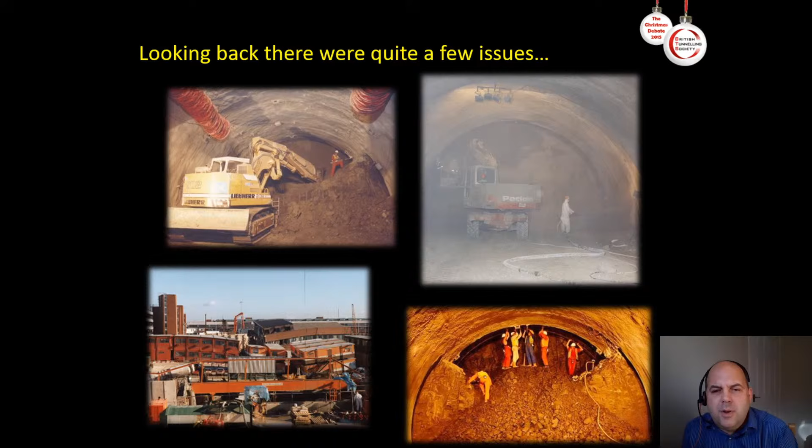This is a scene in a tunnel I worked in nearly 30 years ago. And the interesting thing about this was it was seen as great innovation - this was the latest thing, because this was the application of the new Austrian tunnelling method into a UK project.

The photo looks rather unclear, but that's not a criticism of the photographer. The reason it's like that is because of the amount of dust in the air - dust from the dry mix shotcreting. You can see the nozzle man standing, holding a handheld nozzle, spraying dry mix onto the right-hand side of the heading.

He's got his back to the plant, which is evidently moving. If you look very closely, you might just be able to make out that the plant is actually a cherry picker, and in the basket of the cherry picker are a couple of people working. I was one of those people - we were wiring up instrumentation in the tunnel.

There's lots of things about this photo that we wouldn't want to replicate today. So some questions about our industry: Is it an innovative industry? What are our successes? And what are our challenges for the future? I want to think about those a bit more.

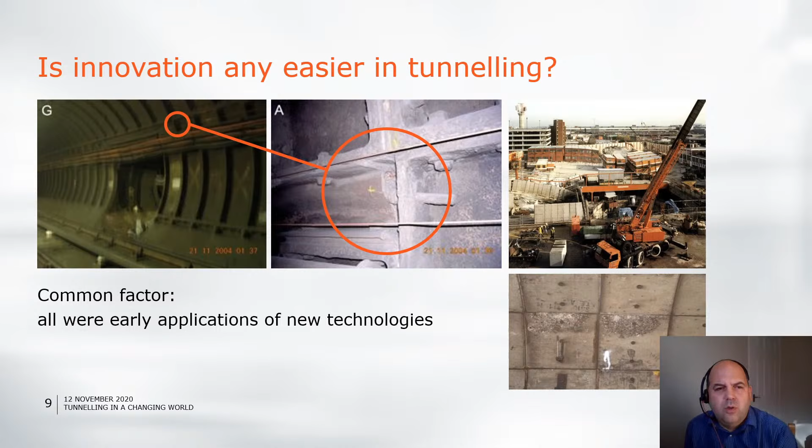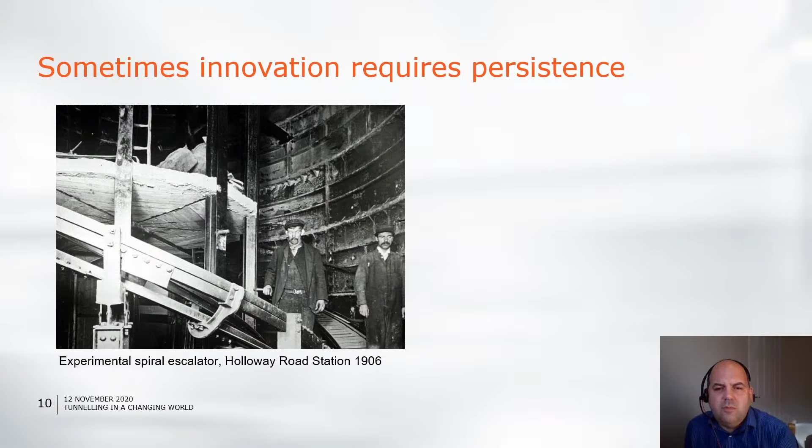Sometimes what you need is just a bit of persistence. This image is an early attempt to put a spiral escalator into a former lift shaft in a tube station a century or so ago. At the time it was a failure. They couldn't get it to work, and the details are now lost in the mists of time. But people have kept on with the idea, and in consequence, one thing you can now find is spiral escalators that work. They're relatively common in some parts of the world.

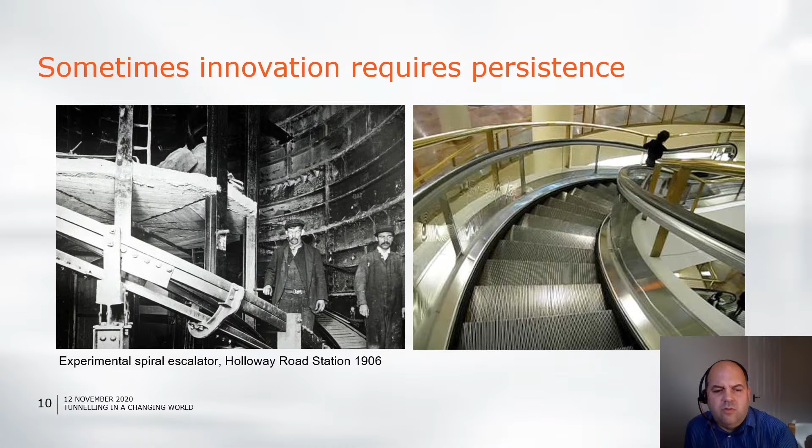It's important to recognise there is a human dimension to this as well. I've mentioned persistence there. I think there are two sides to the way people tend to think about innovation and change. There's the innovator. He or she will be full of enthusiasm, excitement, and will see all the upside benefits of adopting the new product, whatever that may be. And I've seen plenty of examples of that over the years, some of them making proposals to me about how we might better do whatever it was that was the challenge of the moment.

But then I've also seen the other side, perhaps the manager who's charged with implementing the change. There is a downside that some people perceive. It might be concerns about the cost or whether it will work, whether there will be a return on the investment. They're all perfectly reasonable concerns, of course. But what it emphasises to me is there's a bit of importance we need to attach to some of the softer skills as well as the technology when we think about change.

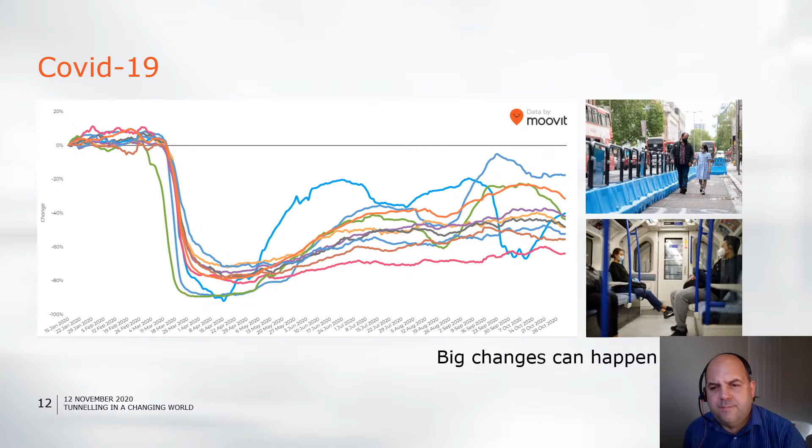So innovation and change, they're driven obviously by a vision for some sort of improvement, but they're not always things that we welcome. They can be a bit risky and they need persistence. And that means it's perhaps quite easy to be a bit passive about changing things sometimes. But I think we have to recognise that sometimes we have a choice. Either we can get engaged and drive what happens, or we perhaps just have to wait passively and see what is done to us.

So the first question I posed was, is tunnelling an innovative industry?

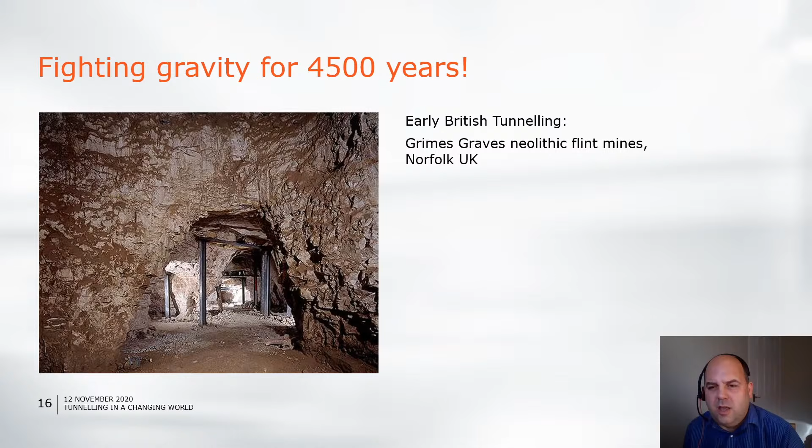A definition of tunnelling that always appealed to me was fighting gravity. As far as I can make out, we've been at it in the UK for about 4,500 years. If anybody can find an older example of British tunnelling, I'd be delighted to see it. But this is tunnelling for the purpose of mining in Norfolk.

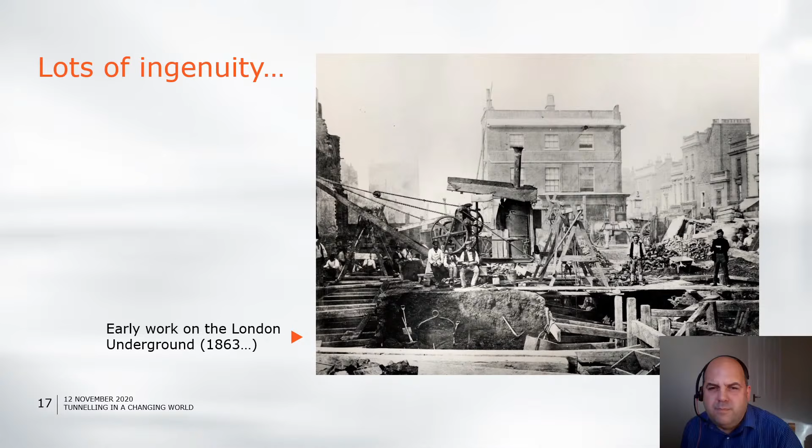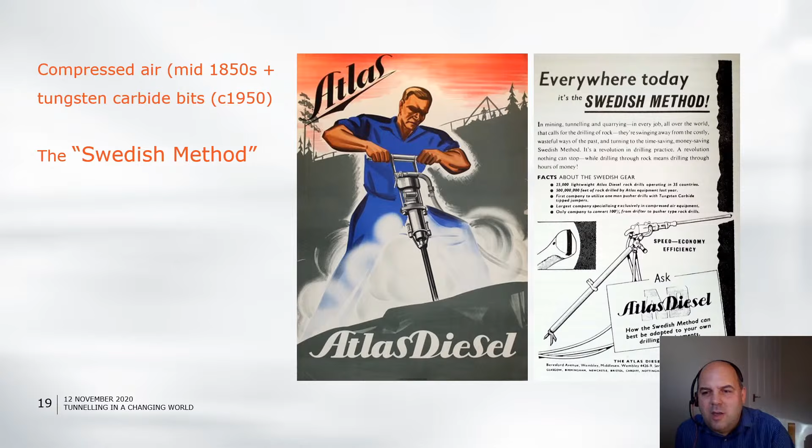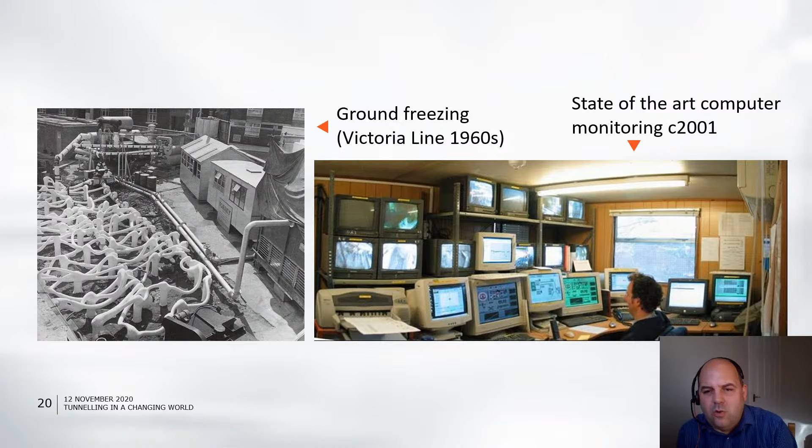And you can carry on in a similar vein. Other things in London, ground freezing, quite a notable piece of technology in its own right, that from the Victoria line. And an image of this control room, which I've always been rather fond of, having spent a lot of time there. Nearly 20 years ago, this was what we thought state-of-the-art computer monitoring looked like. And it was pretty effective.

But we do still like playing around in the muck. There are some things that we've struggled to find better answers to than the traditional ones. We'll come back to this a bit later.

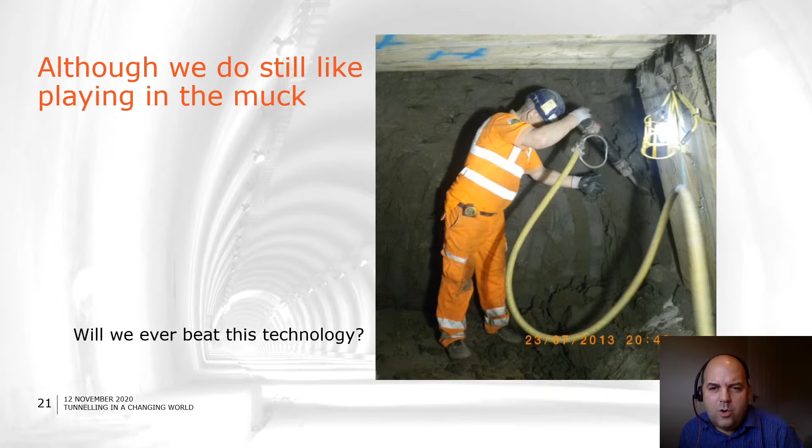So yes, I would argue tunnelling is an innovative industry. We can demonstrate a growing toolbox of techniques. We've got more ways of fighting gravity, if you like. And we do faster and bigger and different conditions, different places. So you can trace the developments we've made. But I'd also observe that quite a lot of our changes are perhaps quite slow, sometimes iterative, reactive. Old habits die hard, and that's something to bear in mind, I think, in a time when some of the changes seem to be coming on us thick and fast.

We've developed a saying in my team, in my current project. We look at the environment we work in, and we describe our state as being a steady state of continuous change. I think you could apply that quite well to our industry as well. I think we are used to being in an environment where we are continuously and steadily changing.

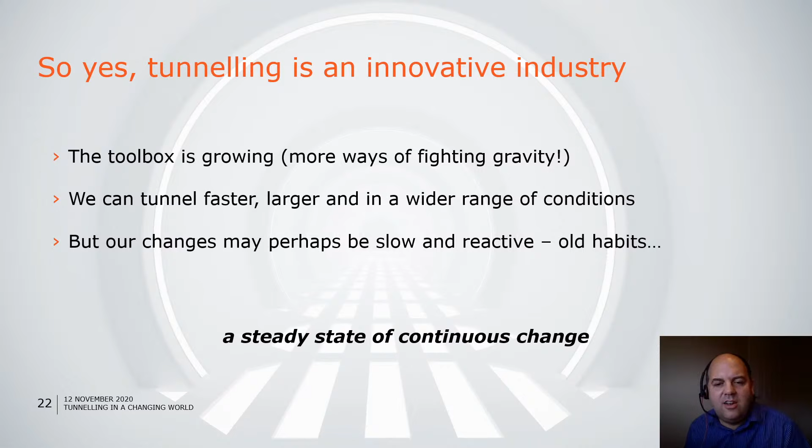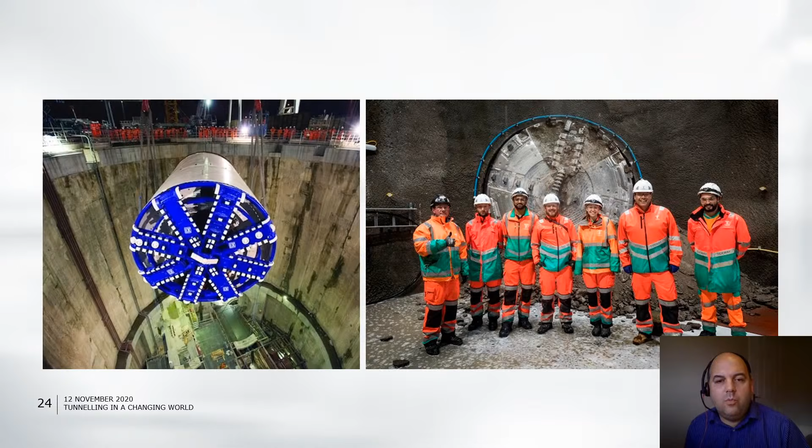So what are our success stories now and in recent times? Clearly, one way of measuring our successes is to look at what we've achieved, the projects undertaken and the tunnels successfully completed. And illustrations here from Crossrail and Tideway are really good examples of what we can do with our tunnelling.

If we think about different ways of measuring what we've achieved, we can evidence the claim that we've got bigger. This slide, prepared some years ago, traces the growth in our shield-driven tunnels over time, from the Tower Subway when we were down at around 2 meters, up to some of our modern railway systems where we're much larger. And now the project I'm currently working on takes that further still. So it's easy to measure and demonstrate that we can do more than we used to be able to do.

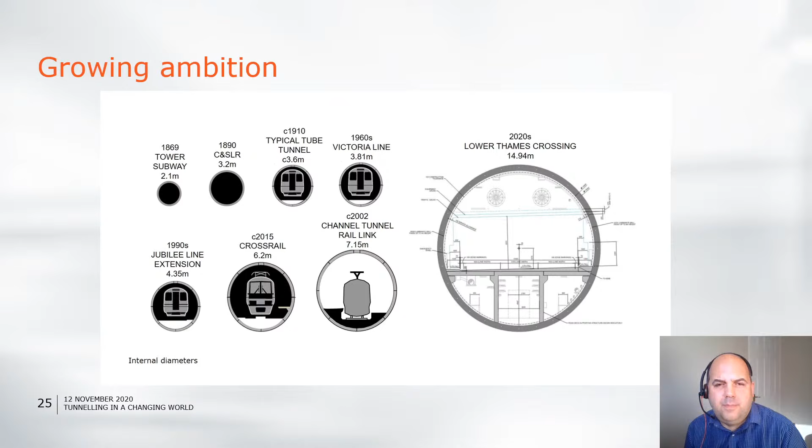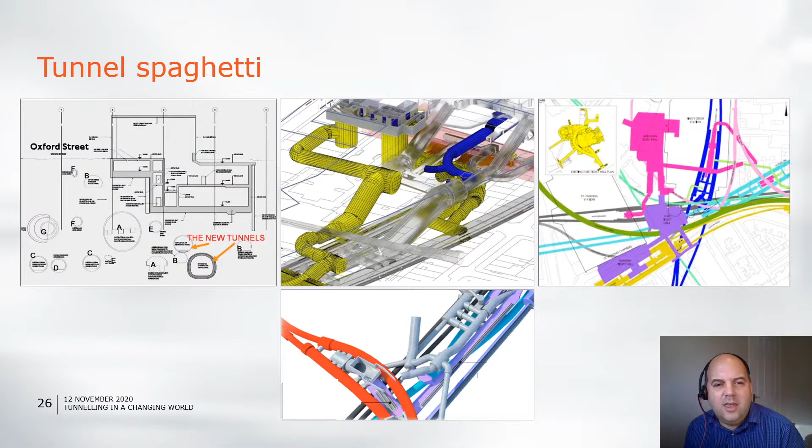We can also do complexity. Tunnel spaghetti was a term that we coined, I think, originally at King's Cross, the top right image here. But these are all images from London Underground stations we've worked on in the last few years. Our ability to create these complex networks of tunnels winding round one another, but without disrupting one another, is a truly spectacular achievement. And it's perhaps a shame that most people don't see the complexity of what has been done.

And we've got better at some of the related things. Our dust and noise control has been a key consideration underground, and we've changed plant and systems to get much better results on that. We've also improved our quality control in general, with things like off-site mix control, to increase the amount of our work we can accept immediately as permanent works, where traditionally or historically it would have been condemned as temporary works only.

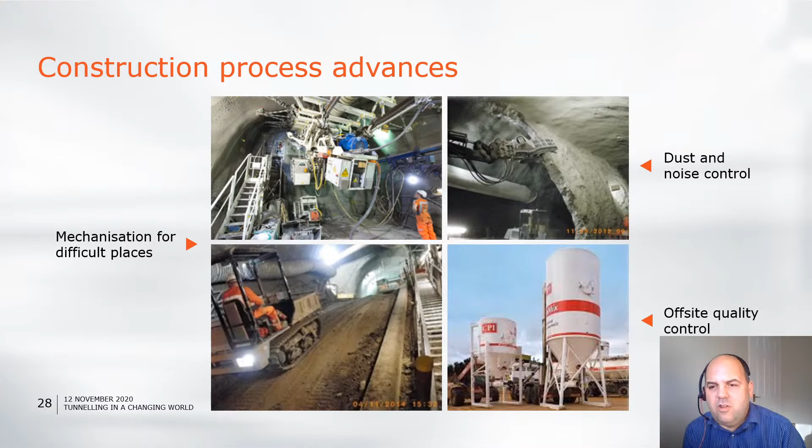We've achieved some other things too. Reducing impacts, and particularly ground movements for urban tunnelling, has been a big subject area and something I've worked on a lot in my career. 25 years ago, the big achievement was to take the Jubilee Line extension past Big Ben without tipping the tower over. Compensation grouting and various measures were used to deliver that work very successfully.

More recently, we've got better with our control, but we've taken on bigger challenges still. I've done a number of projects over the years where we've had to mine under escalators, which are very precise machines and very intolerant of movement. And we can now fairly consistently deliver major tunnels under systems like that without disrupting them and without necessarily resorting to solutions like grouting.

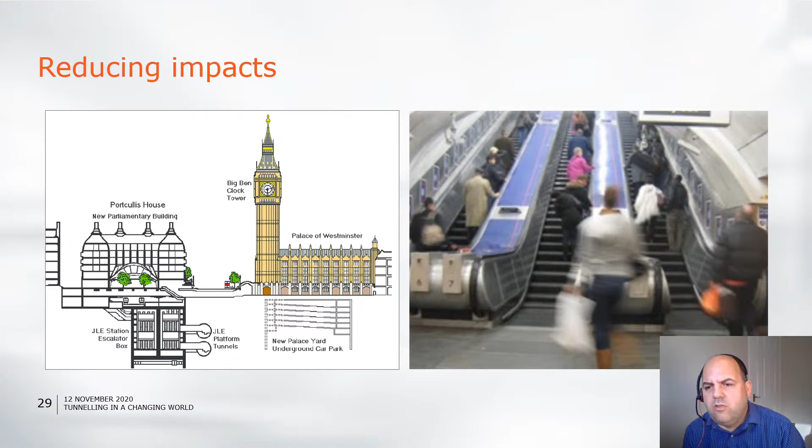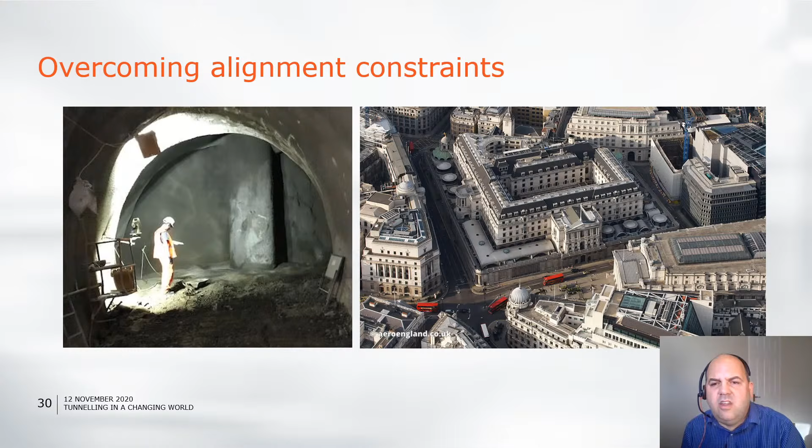And it's really significant in terms of the way we plan future schemes. At Bank, we were able to superimpose the idealized railway alignment on the city layout, and because we could intercept piles and manage them where we had to, we were able to optimize the railway alignment. Historically, we'd have struggled to wiggle through and ended up with a very poor railway. So that ability to deal with the structures we interact with has made a real difference to how we plan future schemes, and has a dramatic impact when one comes to alignment for a new project through the city.

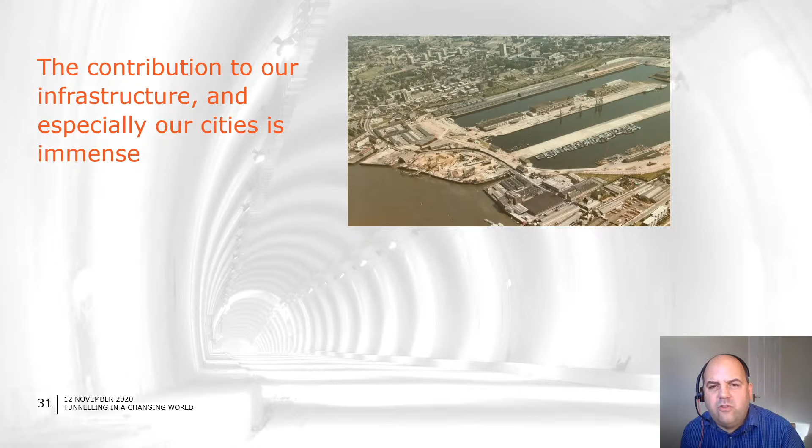And all of this work contributes dramatically to our cities and the world about us. This is Canary Wharf as it was probably about the 1980s. And of course, we now know it is a transformed area. It's our ability to put infrastructure, and particularly underground transport infrastructure, in that has enabled that sort of transformation.

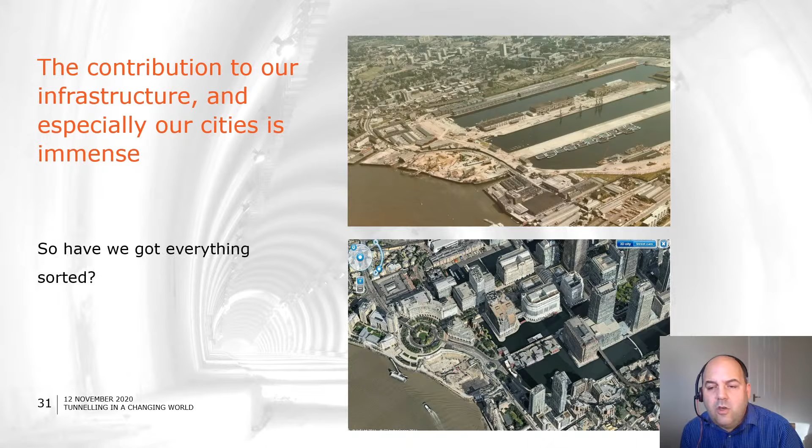So, have we got everything sorted from an innovation point of view? What challenges do we expect to encounter as we move forward? I've suggested a number of things which I think are important to us in the future. Not necessarily all of the same weighting or the same types of issues, but things I think will make a difference.

Let's start with carbon. Carbon is a subject that's in the news a lot at the moment, and certainly within the Institution of Civil Engineers, particularly a subject of a great deal of discussion.

If you haven't already listened to our new ICE President's presidential address, I would very much encourage you to do so. You can get to it through the ICE website. Rachel Skinner has taken zero carbon, and zero carbon for infrastructure in particular, as the key theme for her presidential year. She's highlighted that a very high proportion of carbon emissions are associated with infrastructure. So it's very much in the domain of civil engineers in particular to address that challenge and think about what we can do differently.

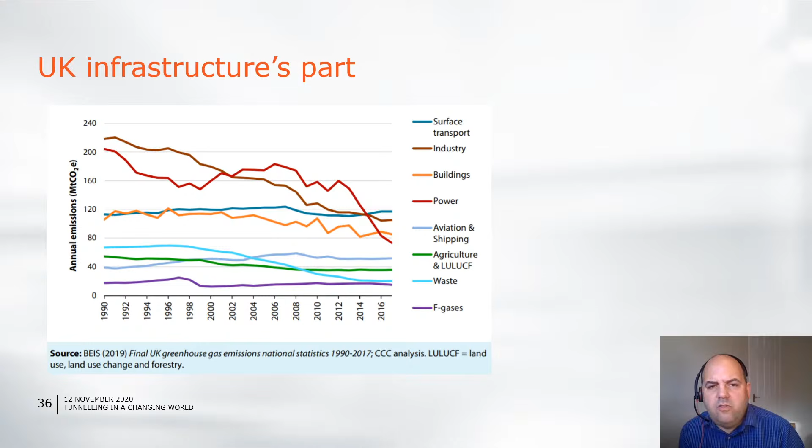And of course, it's now the law that we are aiming for a net zero position by 2050. Lots of discussion about what we can do and whether it should be sooner, of course.

So what does it mean in terms of tunnelling? Where is the carbon in tunnelling? This is a generalisation, but based on various things I've looked at. It's quite apparent that the embodied carbon in tunnelling is concentrated in a few areas. We're big users of steel, cement and concrete, and quite big consumers of energy, and those make up a large part of our emissions. There are then a whole mix of things which contribute the balance.

So what can we do about it? How do we respond to Rachel Skinner's challenge? Well, there are various measures that we can pursue. Firstly, of course, what can we do by design? If we build less, or build more efficiently, then we will reduce our emissions. That raises, I think, some interesting challenges for us, particularly for our design, and questions like redundancy and design life may come much more strongly to the fore.

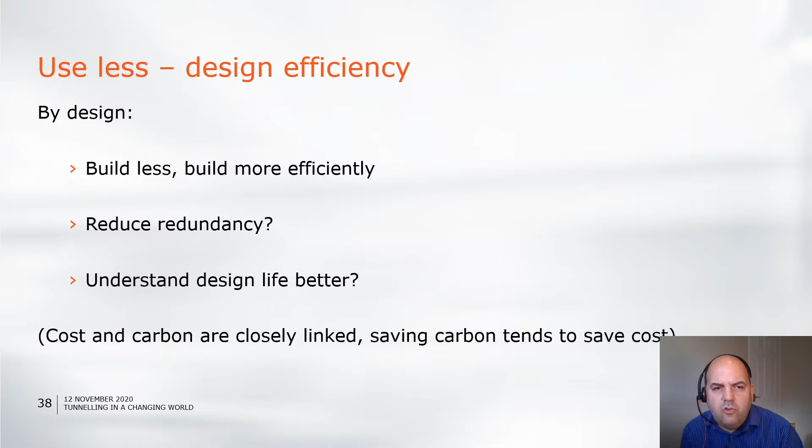I think we need to be having more debate about what is an appropriate level of redundancy in some of our designs. I strongly suspect that some of our structures are, shall we say, somewhat more robust than might actually be required. And of course, carbon and cost link very closely, so it's really just a double incentive — it works together to look at design efficiency. I'm sure we're going to see much more focus and challenge around that as we go forward.

There are other things. I've highlighted already the part that our materials play. There are alternatives in existence for many of the high carbon materials we use, but then we may be reticent about their use, and we will quickly get into discussions about standards and specifications and what's acceptable. But I think those are conversations we need to engage in.

So a couple of illustrations here. One highlighting that alkali activated cements, which are much lower carbon, are now starting to come into use, as an example in London, in piling there. We could look at things like recycled aggregates — we might turn up our noses at some of it, but we might see opportunities in there.

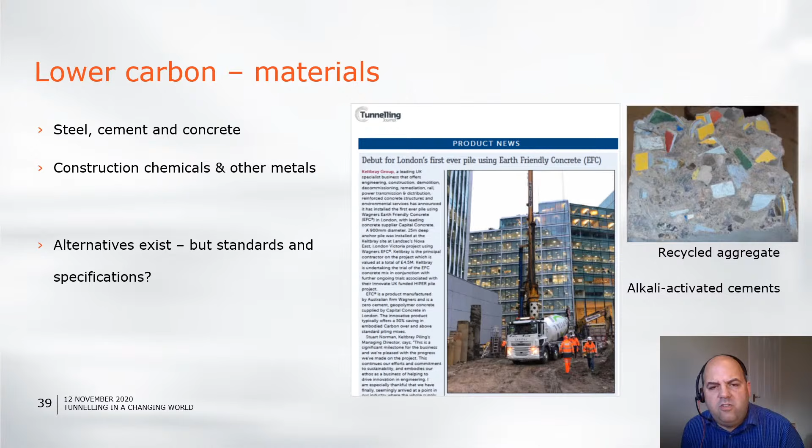We need to be challenging these areas, and we need to look at our energy sources. Clearly, as consumers of energy, we can look at where our energy comes from and use renewables. But I think there are also some interesting questions specific to us as a sector. It's quite clear there are global trends towards battery-powered equipment and vehicles, and also commercial use of hydrogen fuel in vehicles. Those both appear to be very good green, lower carbon solutions, but both potentially pose questions about hazards in an underground environment. So there's a discussion we need to develop further there.

And then there's offsetting - planting forests or whatever to compensate for the carbon embedded in what we've done. It's a valuable tool, but I don't think it should be the answer. It's a secondary response. We should be looking to solve the problem at source first and use offsetting as a tool to compensate where we struggle.

So what are the next steps? A little while ago I think I would have really struggled with this, but now I'm feeling it's a much clearer picture. We know that we need to consider carbon in our decision making. It needs to be there alongside cost and time as the other two parameters we love to use to measure things, and we need to follow good carbon management principles.

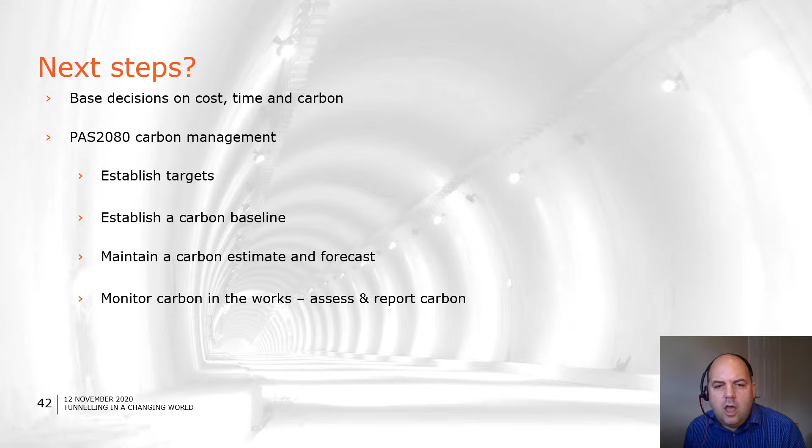We now have a PAS which sets out the way forward. It's not the full answer, it's a step along the way, but like a lot of things, if we start to measure and manage the things we can around this, we will be en route to better solutions. So we should be routinely, going forward, establishing targets, setting baselines, monitoring the emissions associated with our works. All of that is now really in our grasp, especially if we use digital techniques to the full.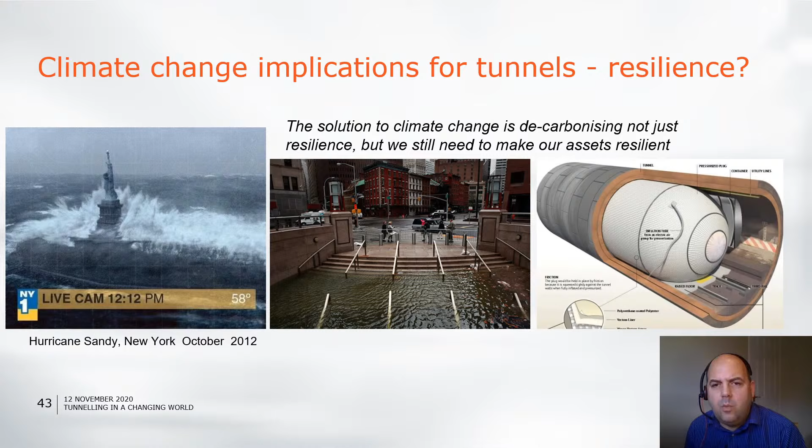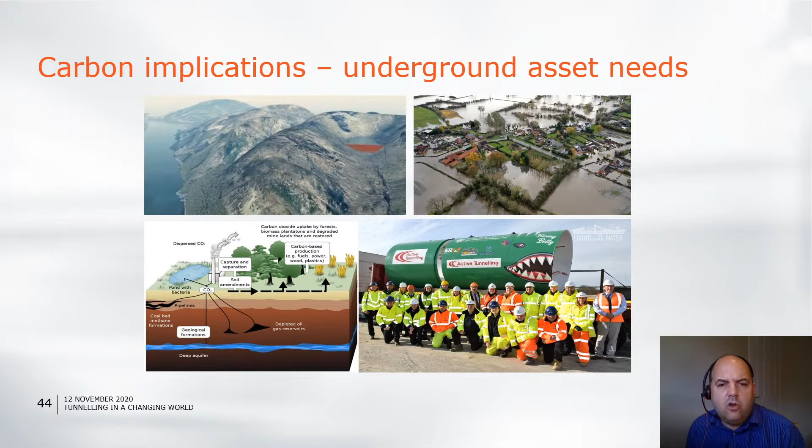So overall, carbon saving, yes, it's driving change in tunnels. It's happening and we do need to act, but we're starting to get a much clearer map of the steps we need to take. We don't have all the answers - we'll need to come up with more and better solutions. It's a real challenge, but I think there's a lot of potential to innovate and improve fairly quickly in our sector.

Let's change tack a little now and think about some different challenges that lie ahead - let's think about the actual assets that we create and use. What does society want from us as an industry? Well, sadly, perhaps they don't actually necessarily want lots of tunnels. What society wants is lots of benefits, lots of outcomes, and I think sometimes we're perhaps not as focused on that as we might be as a sector. So we need to get better at talking in these languages sometimes, particularly when developing the early stages of proposals.

There's lots of good stuff we can be achieving. These are examples from around the world of using underground space to put transport systems underground and reclaim the green space in our cities—clearly a very attractive, beneficial idea.

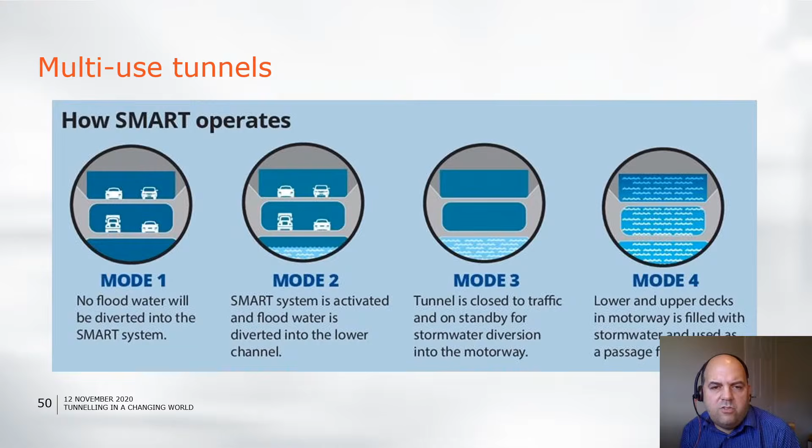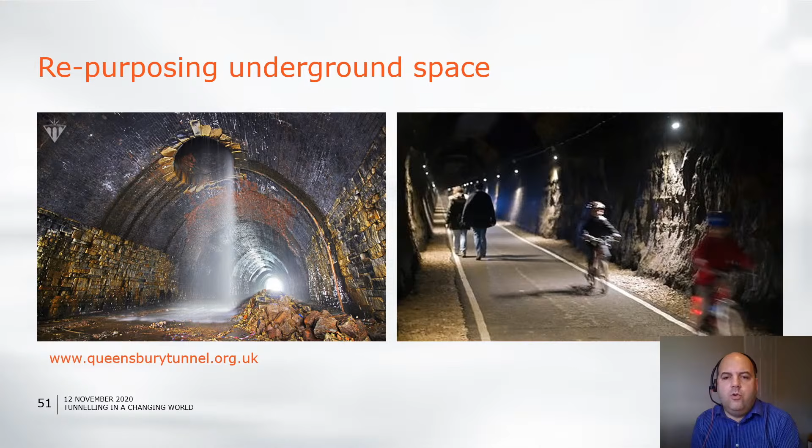On a slightly smaller scale, there are questions around repurposing underground space. We actually have a surprising amount of disused underground space, but it's all assets. I've highlighted on the left the example of the Queensbury Tunnel, which currently has a campaign running to seek support for renovation and perhaps conversion into a cycle route, like the tunnel on the right here.

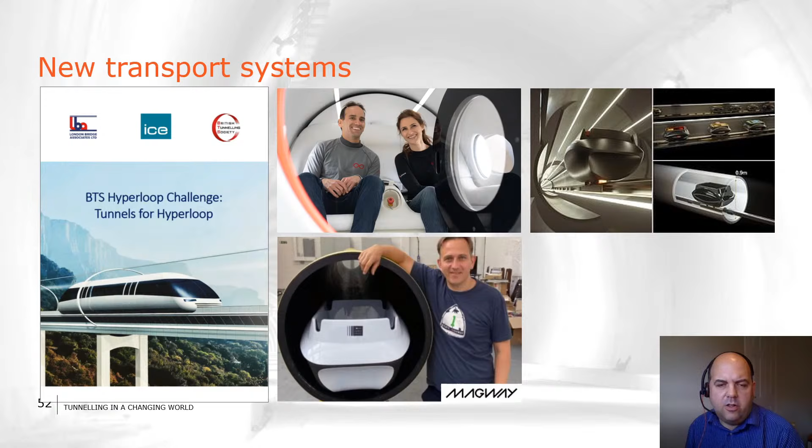Then there are new transport systems which may require or work well with underground space. We're probably all familiar with Hyperloop, which was celebrating its first passenger journeys earlier this week, and Magway, in some ways a similar system, but a proposed freight transport system in the UK. These are all examples of changing demands in society, changing potential uses for underground space, and we need to focus on them.

So all of these are examples of different uses, changes in current or potential use of underground space, and I think it's an area we would all benefit from following. I'd encourage you to support initiatives like Think Deep and ITACUS in the ITA, which are promoting the potential applications of some of these things.

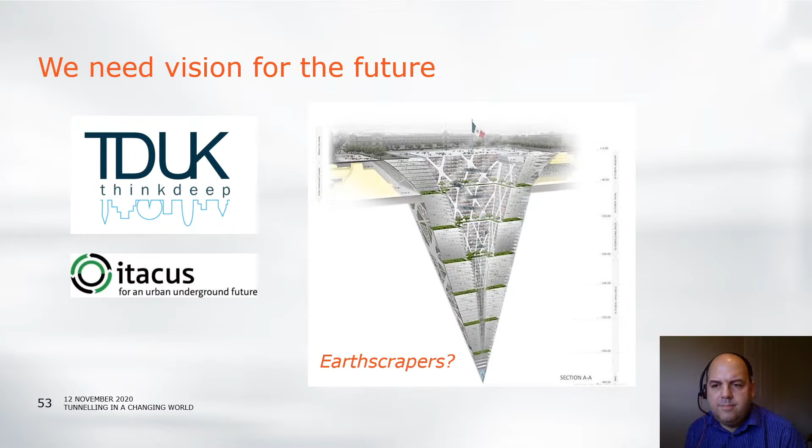Then there's a related set of changing needs issues around aging assets, and that's something quite specific to parts of the tunnel sector.

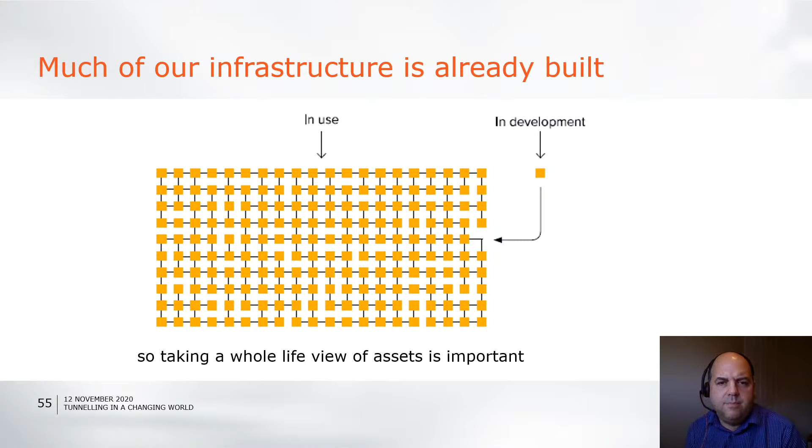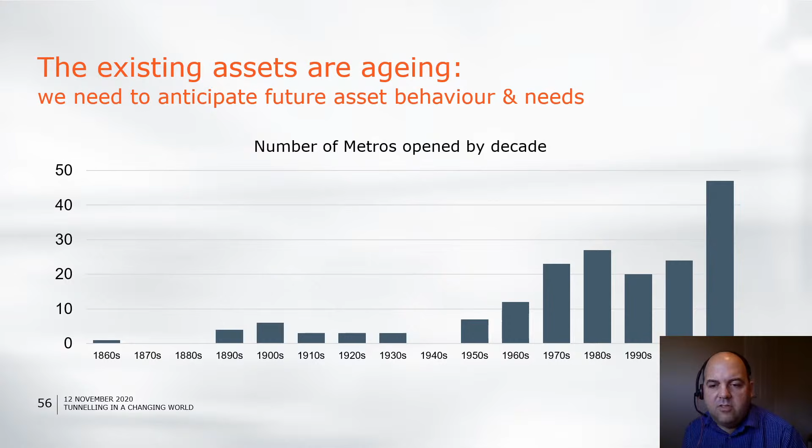Now, the interesting thing to note is that the system life expectancy for a lot of metro systems is probably of the order of 40 to 50 years. So what we're starting to build up now is a sort of bow wave of metros that will probably require renewal.

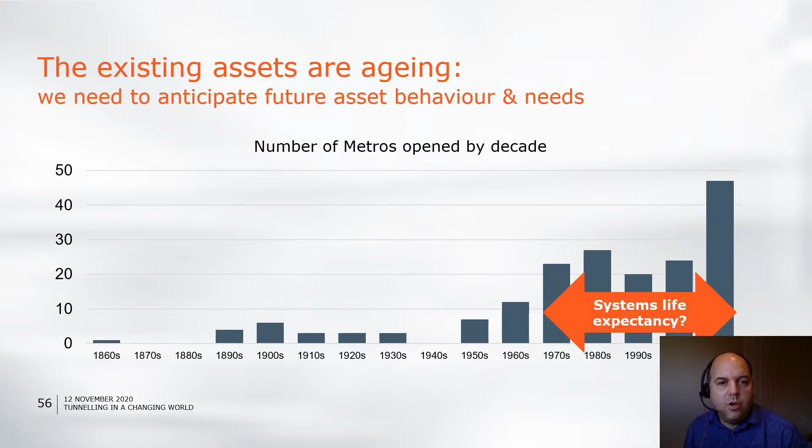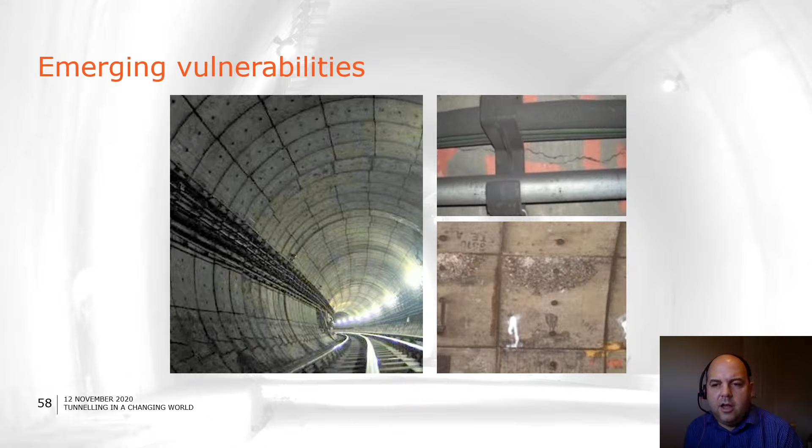Here's another example of structural deterioration in a tunnel, again around the 50 years age mark—cracking and spalling. This was a section of the Jubilee line a few years ago, where an expanded lining was getting into some distress.

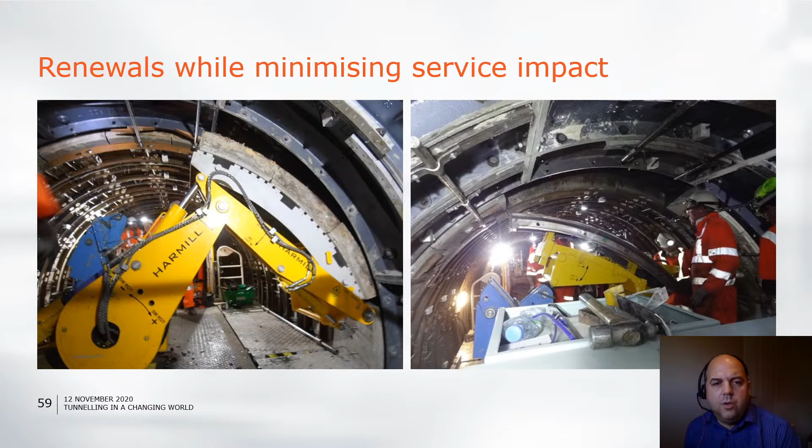But it's an important one to note because it's probably the sort of thing we might expect more of in future years. And just to illustrate the point, here's another job I was involved in a little while ago, actually on the Washington DC Metro, and a similar problem, renewal of elements of the structure required and seeking ways of doing it with minimal disruption to the service.

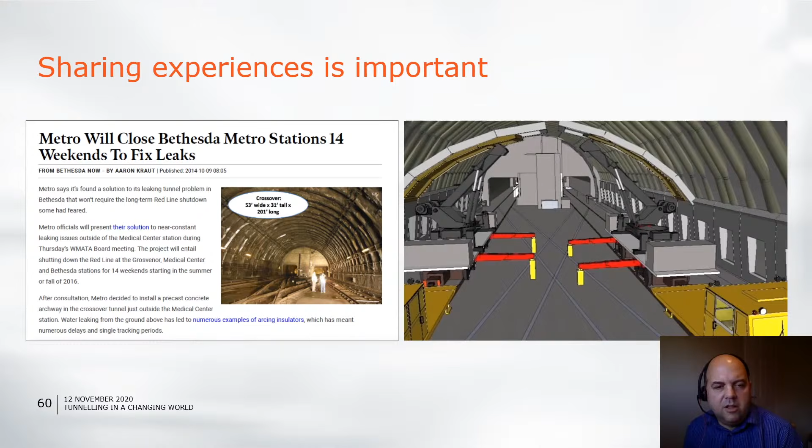This is something that's going to repeat around the metros of the world as those systems that were built after the Second World War start to deteriorate. So when we look at our existing stock of tunnels and we think about what happens to them, what we observe, it's important to recognise that tunnels very rarely collapse, but they do deteriorate, and we should be anticipating that more of our workload in the future may well be refurbishing, renewing the assets that already exist.

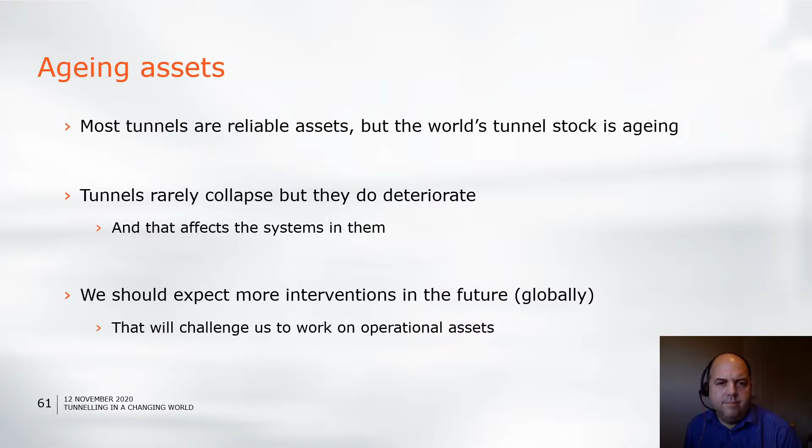So now I'm going to switch to another challenge, or perhaps an opportunity more than a challenge, but the world of digital, which is something else that is changing very rapidly for us.

So to use the language of the Cambridge Centre, this is what smart infrastructure is all about. This is bringing together our physical infrastructure with the digital infrastructure that we can now create, we can now use, in order to get much higher levels of performance out of the combined system.

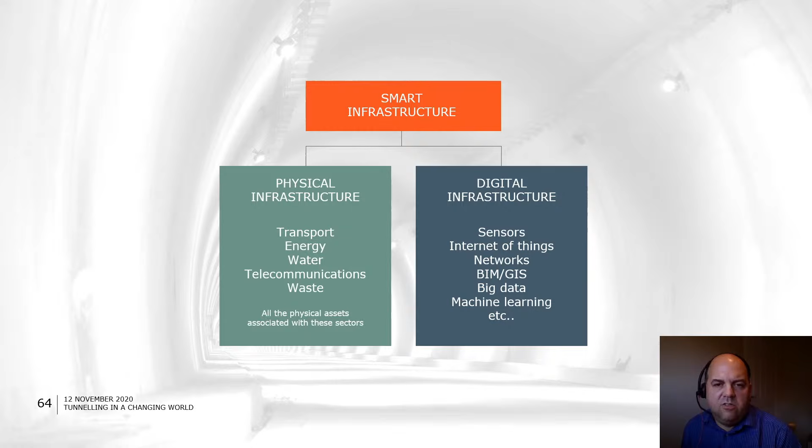So let's have a think about where we are with digital technology. What are we doing today? And of course, the core of a lot of it is the use of 3D BIM increasingly and common data environments. We're getting used to that idea. We're used to seeing the data shared in this sort of format.

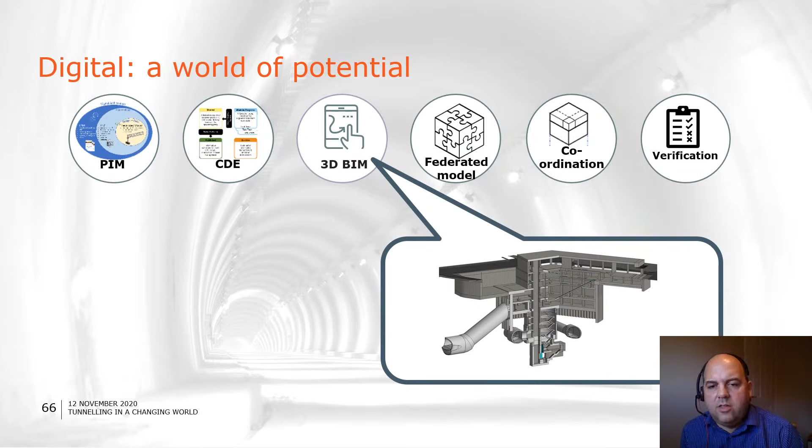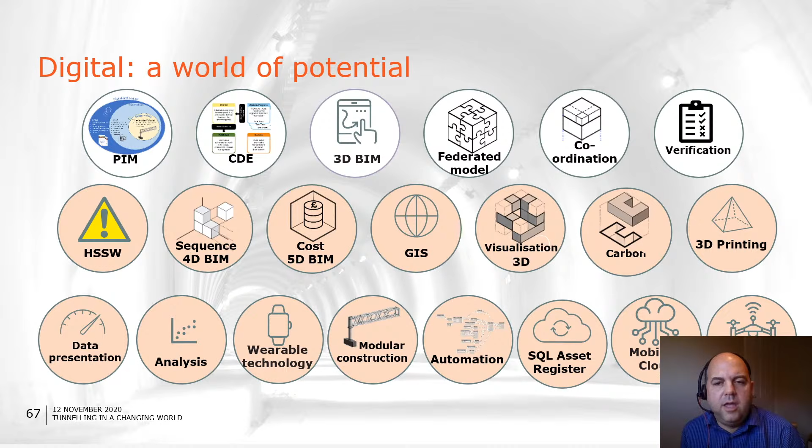But there's lots more potential beyond that with digital. There's a whole range of things that we should be developing and exploring together. Our digital platforms are a great way of sharing health and safety information. GIS provides us with a really good way of communicating ideas and layouts and basic information in all sorts of discussions as we plan works.

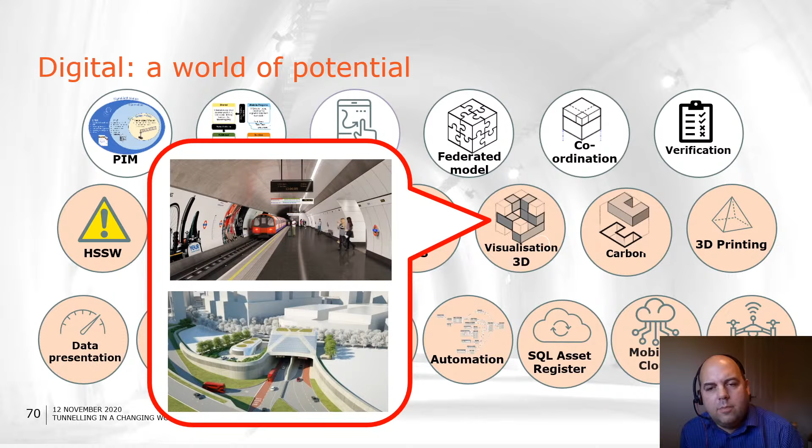3D visualizations are proving very, very valuable in helping the wider society understand what we're proposing, what it will look like. And in just the same way as we can start to put a cost dimension into our models, we can now look at putting a carbon dimension in so that we can monitor carbon more effectively.

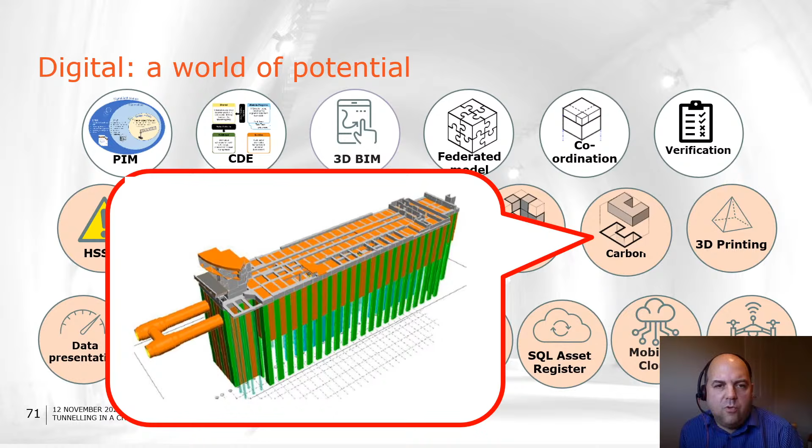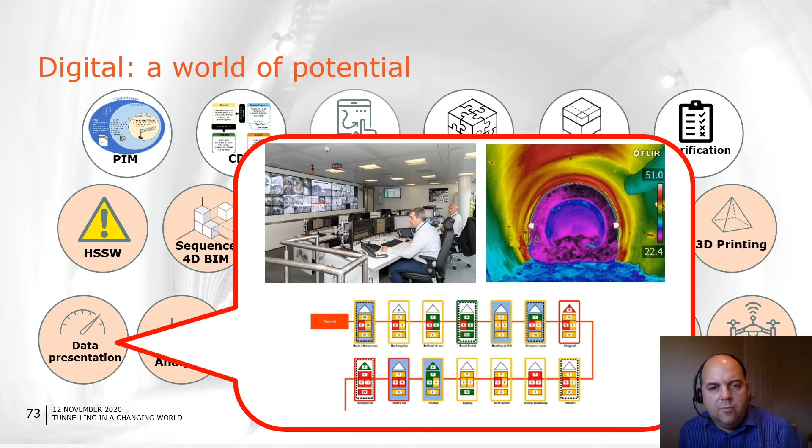We still have problems of burying ourselves in information, but actually digital provides great ways of managing that information and helping us make sense, whether it's visualizations like the thermal image graph here, data feeds into control rooms, or any number of different forms of dashboards of key information. It can all be done digitally very effectively.

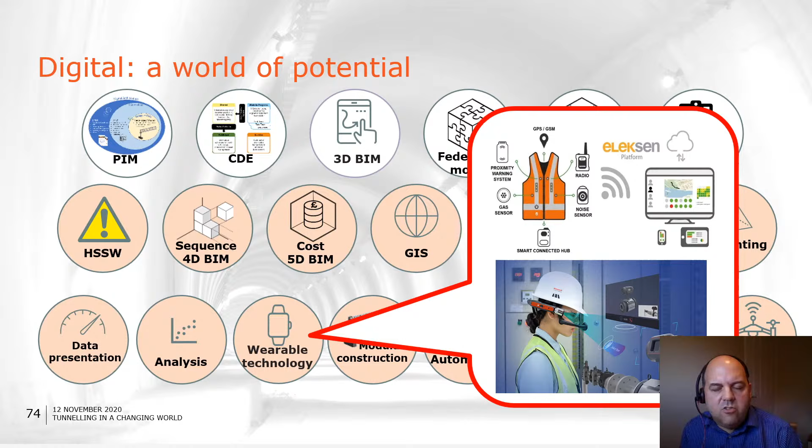Wearable PPE is an emerging technology. Things like proximity sensors and health monitoring are potentially great measures to improve the way we look after our people. Modular construction, well, we're kind of kings of that already in segmental tunneling, but it's all enabled or helped by digital now.

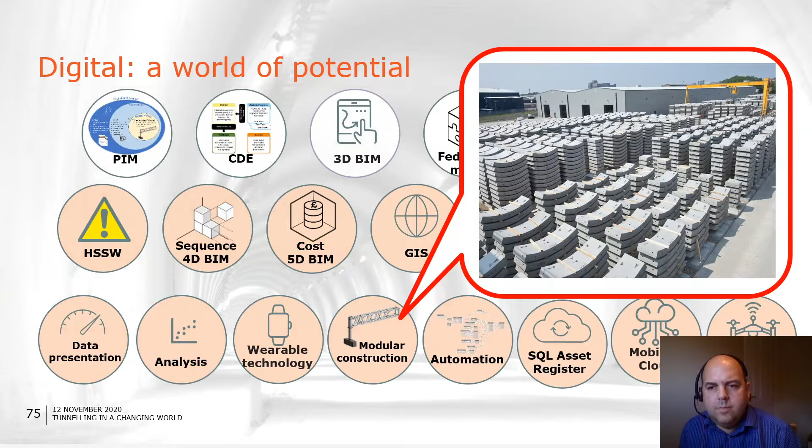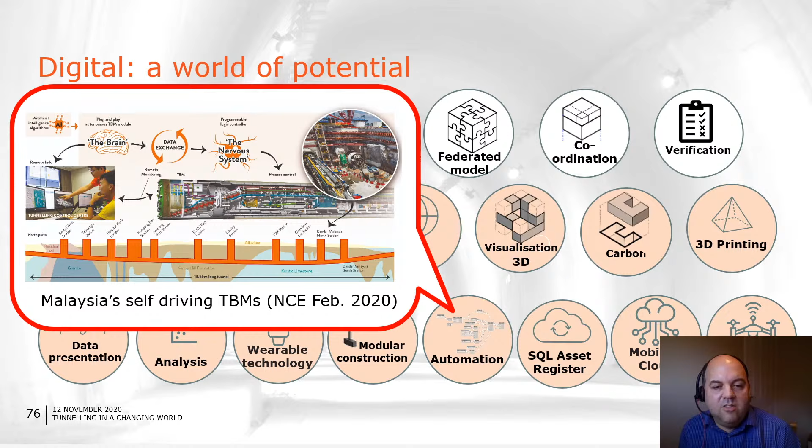And potentially in the future, there's automation. This was an illustration from NCE earlier in the year of reputedly self-driving tunnel boring machines in Malaysia. And it just goes on and on, the potential. There's robotics, that's already in the tunneling industry with equipment for tool changes being developed and robotic earth moving plant.

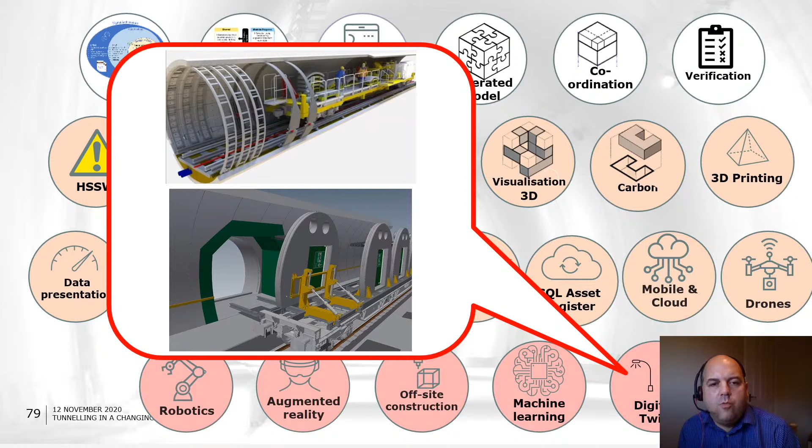There's digital twins. Some of the works I showed you earlier have been replicated in digital models and tested in a digital environment. So when we combine all of these technologies, we have huge potential for change.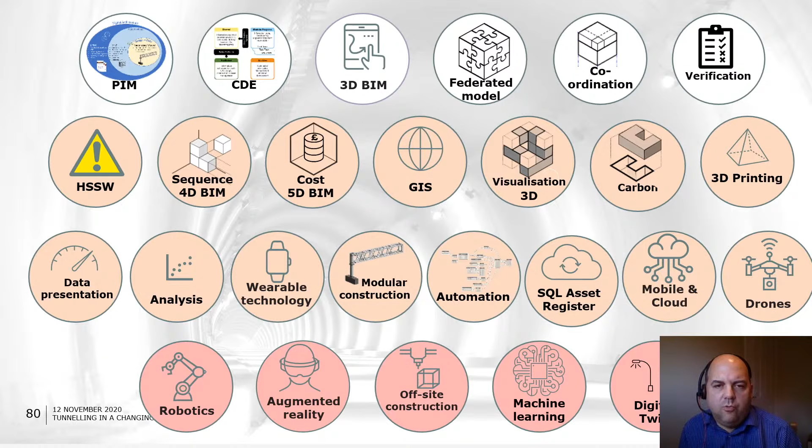Taken together, we have all the bits here of a digital revolution, but what we probably don't have yet is all of those bits joined up. I think one of the changes that must be coming soon is to get much more effective at integrating all of those parts into a single golden thread.

I'm going to turn now to the last of the areas I wanted to talk about, and just reflect for a few minutes on some of the people issues in our industry and what might be changing there.

What matters to us about the people in the industry? There's health and safety, mental health and well-being, which I think are getting much better recognised now, reflecting what's happening in our wider society. There's behaviour and the use of behavioural science, which has been helpful for some of us but probably less widely known. And there are all the issues around equality, diversity and inclusion, which we also need to reflect on. So it's a broad area.

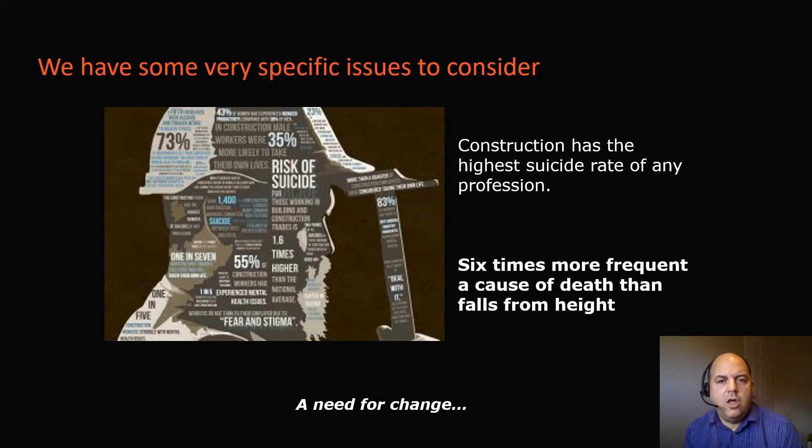There is a very serious reason why I wanted to pick up on people issues. These are statistics for the construction industry rather than just the tunnelling industry, but it's sobering to see that construction has the highest suicide rate of any profession. Suicide is six times more frequent a cause of death than falls from height. I think that's as strong a call for change as anything we've talked about today.

So we do need to focus more on our people and their well-being. There is some really good practice around our industry. Anyone who's done the EPIC training set up by Tideway will, I'm sure, recognise the value of that immersive training, aiming to improve our behaviours and understanding around safety.

There are other things that go on in our industry too. I know from my own experience that good collaboration and good behaviours have always been at the heart of the most successful jobs, that generally the jobs that have gone best are the ones where we've all shared goals and had a clear common focus. That's a challenge to our management sometimes, and certainly to our contract forms. We need to work as an industry towards more collaborative working, empowering people to address the real challenges rather than just fighting each other. We work best when we're all in it together.

So I'd like to propose a change in addition to the smart infrastructure model I showed earlier. I think the infrastructure we're working with is really made up of three things: the physical infrastructure and the physical work we do, the digital infrastructure and all the improvements that brings, and the people part of our infrastructure, which is as important as anything else. It's taking the three together that we will make successful changes going forward.

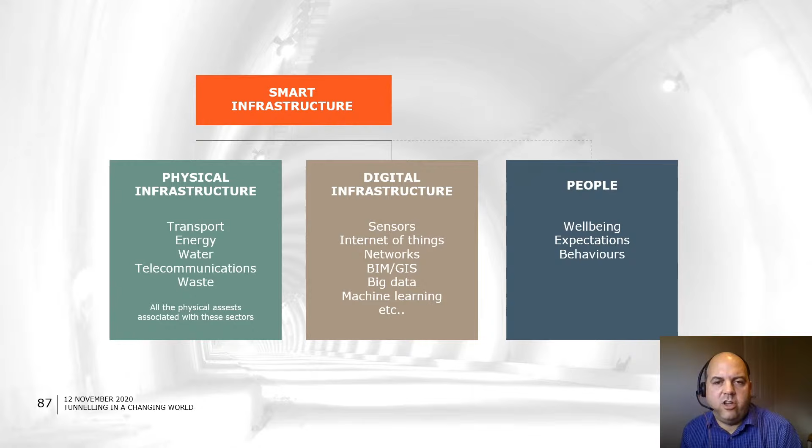So people, for me, are right at the heart of this. We do have a great skill base, but we also need new skills and new thinking. We need the skills that come with the digital revolution, the skills that come with understanding the technologies around carbon, and the skills to identify the future needs and uses of our infrastructure. It's all challenging, interesting, demanding work, but it's also good fun.

I've enjoyed working in this industry, and I think we have a great positive prospect to offer to bring people into it now. I think that's really important, and when we are drawing people in, when we're recruiting, we should be thinking about that broader picture in what we present.

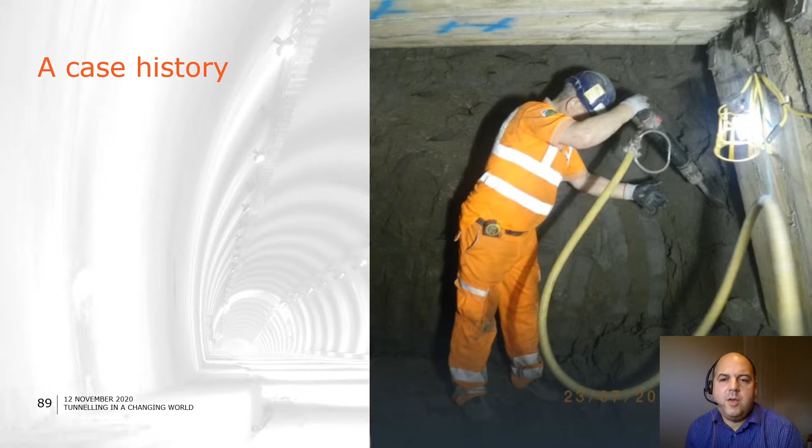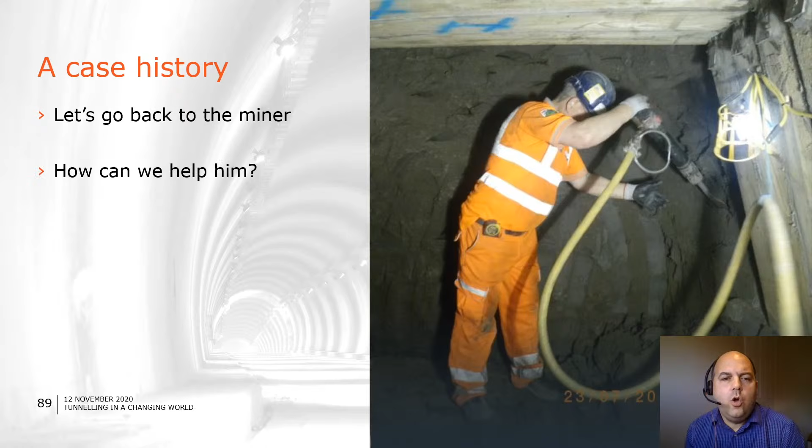So finally, to close, I just want to show you a short case history, coming back to our friend who was doing the hand mining. We know the environment he works in, we know it's demanding, long shifts, hard physical work, perhaps stressful too at times. How can we help him? What can we do to make it better?

What would add some value to this? Well, fairly obviously anything that helps with health and safety, but particularly things that could reduce fatigue and the associated risks, things that would improve his well-being. And in this age, we also need to be aware of the need for legal compliance. Can we apply some innovation out of everything we've talked about to help with this?

So this is a note of appreciation to what I think was a really great piece of work that I saw done on the Bank project by Dragados and London Underground working together. It was a trial to monitor fatigue and see what we could practically do to measure and better manage fatigue in the workforce.

It used a technology based on a wristband, although there's a bit more behind it than just your average Fitbit. The wristband from Fatigue Science comes with a data set behind it that allows us to interpret the results much more accurately, giving a much more effective and objective measure of fatigue and of the effectiveness of individuals at work. There's a huge database behind this from which we have a quantified scale, so we can classify results and clearly understand where the risk is.

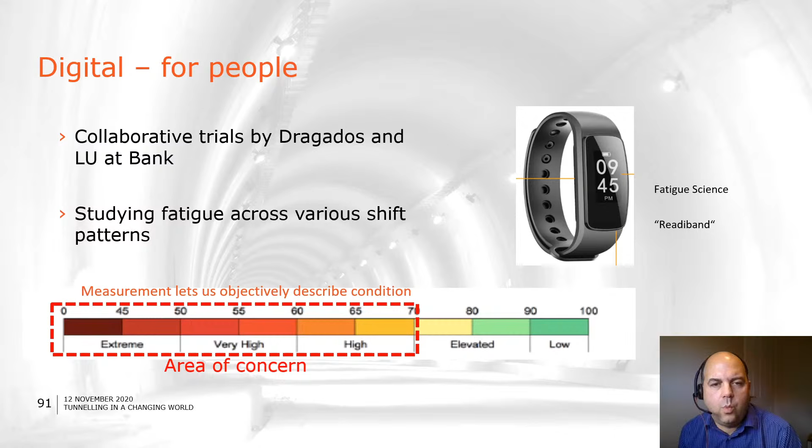The trials covered a range of shift patterns, an opportunity that was presented at Bank, and therefore we had the ability to directly compare performance on different shift arrangements. And we did see differences. We could quantify the effect of certain shift patterns, certain shift lengths being better than others in that they reduced the amount of high risk time.

The fatigue risk never completely goes away - we're dealing with human beings - but you can mitigate the risk down. We could also start to understand some of the other things that were going on. We could look at things like sleep duration and various measures of effectiveness of individuals over the period of a number of shifts.

But the results from it allow us to make a very considered management response. We can recognise where the greatest risks are. We understand things like circadian rhythms, we understand when people perform best. And what happened at Bank was the application of the digital science, the methodology in the trial enabled an intelligent response that could adjust shift patterns, move tasks around, and therefore objectively reduce risk in the workforce.

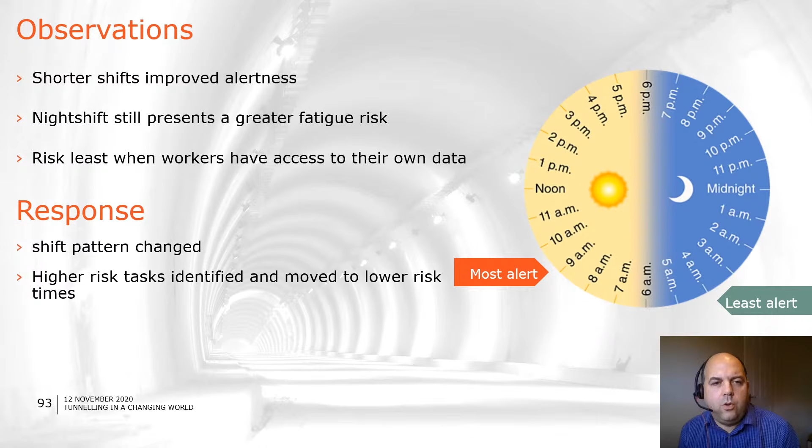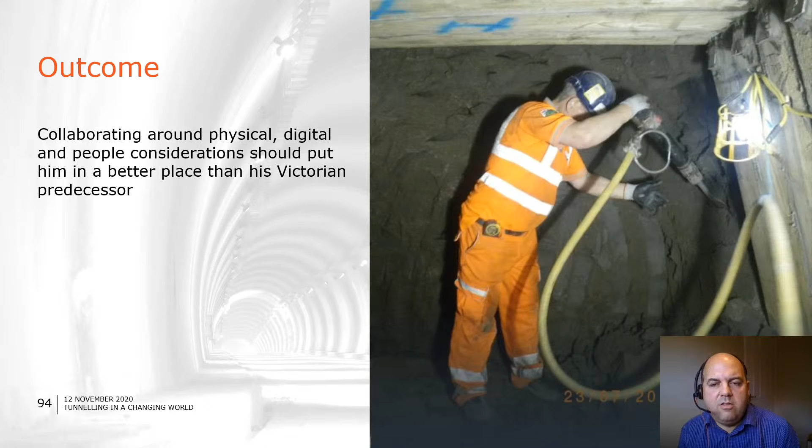This is exactly the sort of thing I think we should all be striving to do more of in the future. So I commend that team and recommend that other people look into that piece of work. A really good example. And the outcome, of course, is that by bringing together these considerations of the physical, the digital, and the people issues, we should have put our friend in a much better place than he was previously.

So some concluding thoughts. I think the tunnelling industry is absolutely based on innovation. Change is normal, we're good at it. But the challenges that are ahead of us now are bigger and more urgent than ever, and we're going to have to work hard to respond.

Sometimes it can all look a bit scary, but I think it's inherent in engineering, and certainly our sort of engineering, that there's an element of bravery and an element of persistence that is important. It's part of what we do.

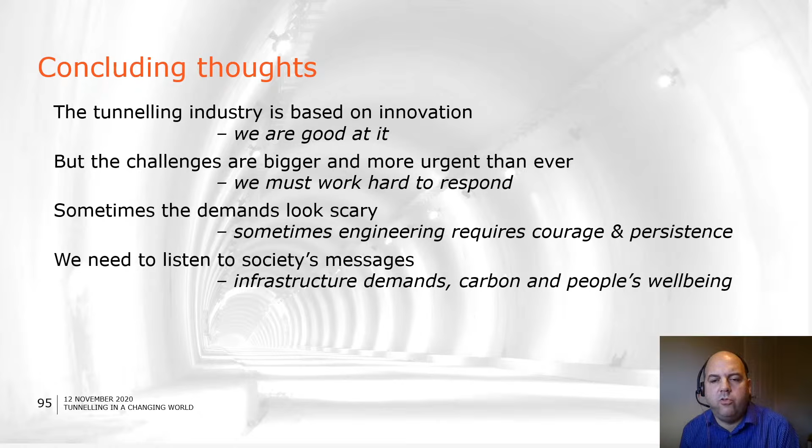We also need to listen very closely to society's messages. We can't afford to ignore not just the immediate customer, but the wider requirements of our society, and we must respond to those things. We need to make the most of the opportunities that we do see.

When we get new skills or methods or materials, we need to welcome them positively. Yes, we need to test, we need to be sure that they're right for what we're doing, but they are fundamentally our opportunity to get better in the future. And what we do in the future has to be so much more than what we did in the past. It has to be better.

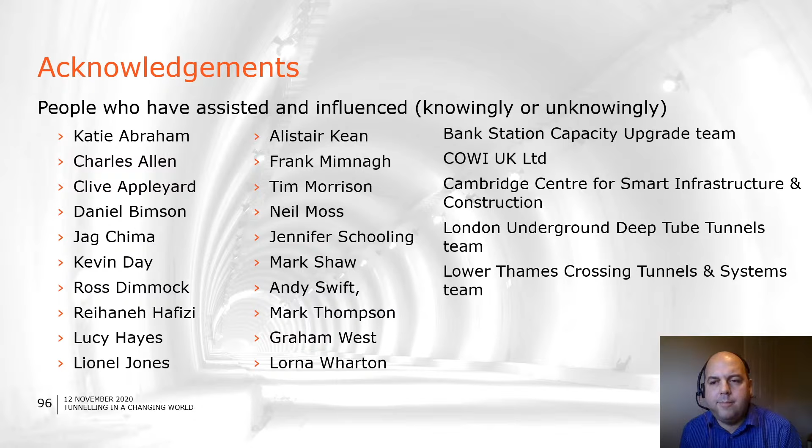As a closing thought, I've looked back quite a lot into history. I think what was developed in our industry 100 years ago was very impressive. What will we be remembered for in 100 years' time? Thank you.